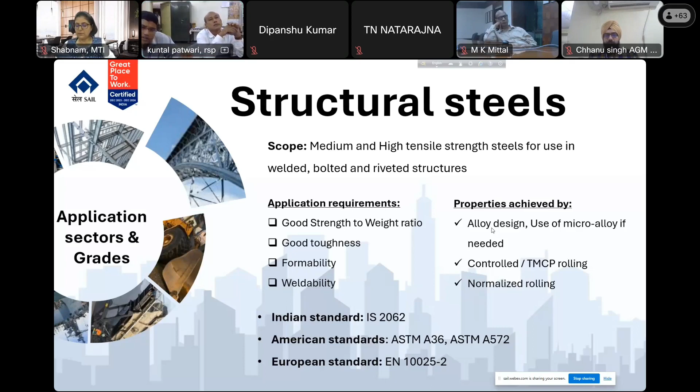Next, I'll talk about another sector of application, which is structural steels with atmospheric corrosion resistance. This type of steel is mostly used where we need a very good strength to weight ratio. We do not need to make the structures bulky or heavier, like using very thick plates. At the same time, we also need atmospheric corrosion resistance. This kind of steel may also be used in an unpainted condition - the specification allows us to use it unpainted, guaranteeing there won't be any corrosion.

So how do we achieve this corrosion resistance? We use some alloys like chromium, nickel, copper, the ranges of which are already given in the standard. Then again we customize it as per our need. Now, how do these elements protect my steel from getting rusted? They form an autoprotective layer - they themselves get oxidized and form a protective film over the base layer, preventing further corrosion.

This kind of steel is very much in demand in areas prone to corrosion, for example areas near the shores, near the sea beaches, where there is a lot of moisture around, a lot of salt around. So we need this kind of steel. For that, we also need to ensure high weldability, because when we add alloying elements, the carbon equivalent will automatically rise.

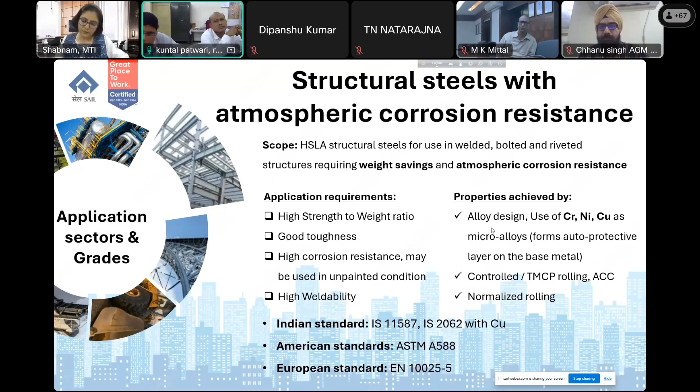Next, we move on to the next application sector, which is boiler and pressure vessel applications. Here, the steel has been categorized into three parts: steel for moderate and low temperature applications, and steel for intermediate and high temperature applications. This depends on the temperature, like if used in boilers working at high temperature, such as steam boilers, they will go for high temperature applications.

And there is another class, which is a heat treated, quenched and tempered condition steel. So these are the three categories of boiler and pressure vessels. Now, the application requirements: YS to UTS ratio should be high, there will be high toughness, high weldability, and we achieve this by designing the chemistry accordingly, going for TMCP rolling and normalized rolling as well.

In Indian standards, we have two specific boiler and pressure vessel codes, 2002 and 2041. 2002 is for high temperature application, and 2041 is for lower and moderate temperature application grade. Similarly, in ASTM, we have 515, 516, 517, and 537. 515 is high temperature, 516 is lower temperature, 517 is quenched and tempered, and 537 is also heat treated. For European norms, we have 10028.

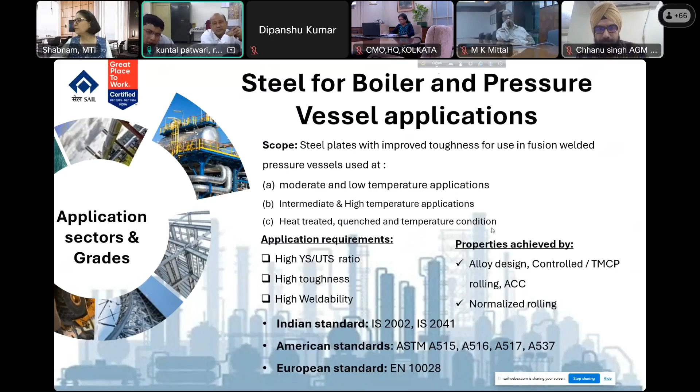Right, sir? So we'll be dealing with the technical specifications in the coming slides. I've just pointed out the brief over here, we'll go in depth in the later slides.

Next is another sector which we cater to, a very niche segment, and there is a lot of market I feel in Western India and in the Middle East as well - oil and gas pipelines. We had supplied material to Welspun and other customers, MAN also we tried, API grade plates and coils. There are some few orders as well.

So in this segment, we need very high specific strength, high toughness, high weldability, and the YS to UTS ratio has to be strictly adhered to, which is actually 0.90 in most cases - customers ask for a more stringent one. And there has to be a very high level of steel cleanliness, which we ensure by using inclusion modification control, by adding calcium silicide and other methods, by using compulsory RHOB which is vacuum degassing, etc., and a very low sulfur steel.

So earlier we had only American standards, which is API 5L, but BIS has developed another standard in line with the requirements of API and ISO, that is IS 18384. As of now, API is the leader in this segment - American Petroleum Institute certifies everything, but BIS has also moved in that path, and hopefully later we will be recognizing this and using steel for this standard as well.

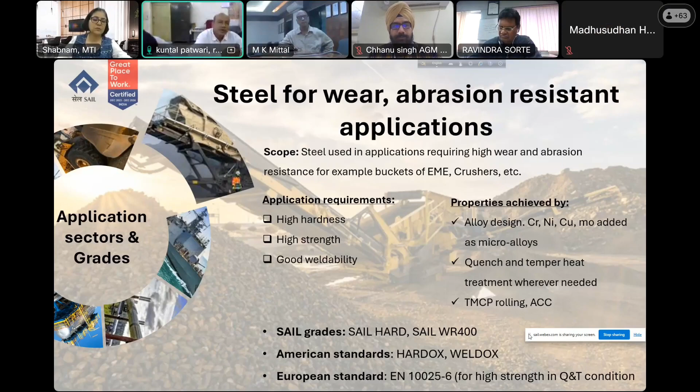Yes sir, actually as you know we are trying to get a normalizing furnace for our new plate mill, but we are still not able to finalize that. So what you are telling is another step beyond, we have to keep making effort.

That's all, yeah. So definitely, like there are plans which you pointed out correctly, there are plans which are having an inline quenching and tempering furnace and facility. So maybe in near future or sometime in the future we'll be able to do that as well. So sir, moving on to the next section, that is...

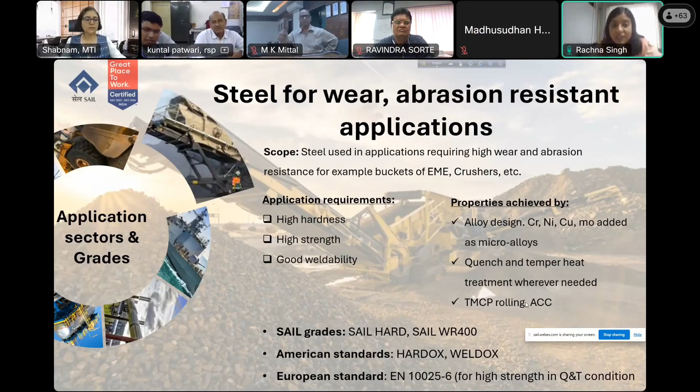One second sir, sorry to interrupt, I have one question here. This is Rachna from BSO Chennai. Yes ma'am, yes Rachna, go ahead.

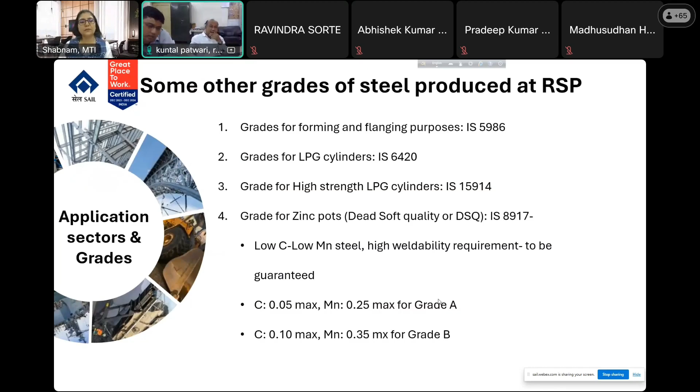Moving on, we'll talk about technical specifications. There are a lot of standards and specifications, and it's not possible to discuss all of them. So I've tabulated the applicable specifications side by side with the product specification - what are the testing standards, product standards, and inspection standards. Accordingly, orders can be booked and customers can be sensitized to these requirements. You have to stick to this, or if you need a different specification, you need to go for a different product. This is a very brief overview, so I'll skim through fast.

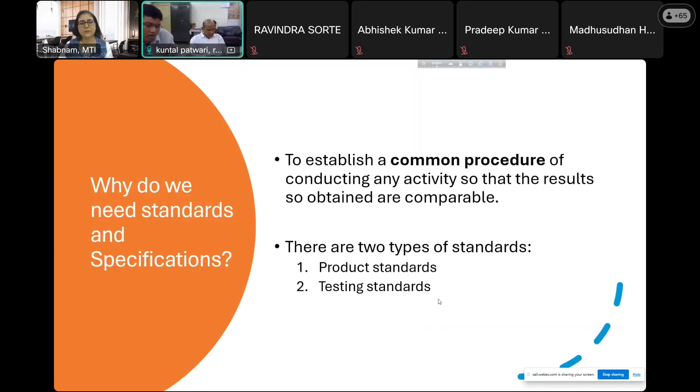We have two types of standards - product standards and testing standards. Whenever there is an order or we talk of a grade, every grade has a meaning - the name itself speaks about the grade. For example, take IS 2062 grades. The first two letters tell you it's an Indian standard. Then 350 tells you the minimum YS at the lower thickness - the least thickness - what minimum YS is to be achieved. And BR stands for room temperature charpy.

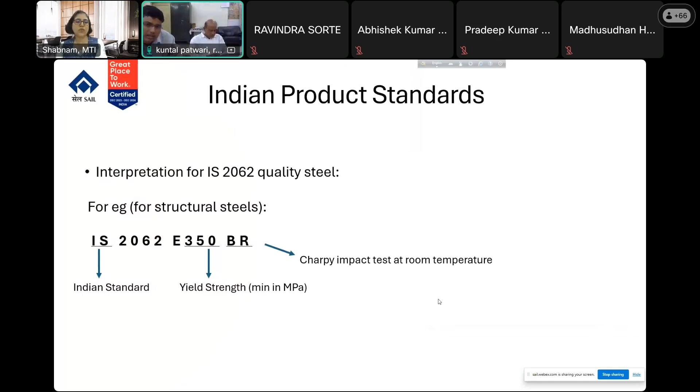So this is how we can at least understand what grade it is. We can make the customer understand what kind of material he is expecting and what are the requirements of that material without directly going to the standards - we can see the name and talk about it.

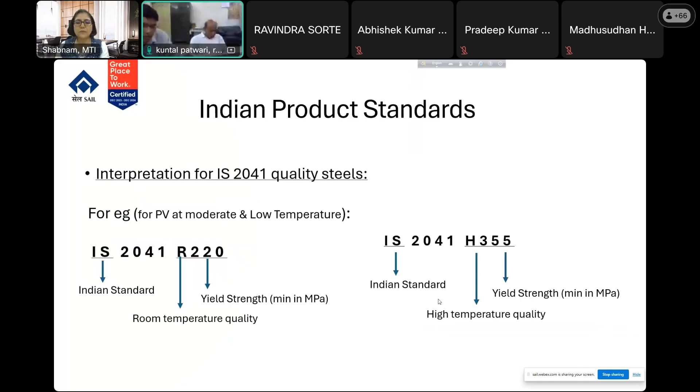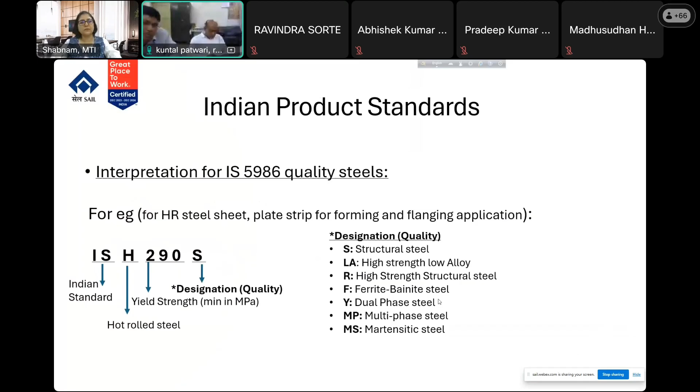There's another grade for flanging operations, forming and flanging operations - we make HR sheets and strip, where H stands for hot rolled steel, the number gives the yield strength, and S gives the designation. This designation depends on the application. We have structural steel, HSLA, high strength structural steel, ferrite-bainite steel, dual phase steel, multi-phase, martensitic - there are a lot of grades in this particular standard, depending on the type of application the customer has.

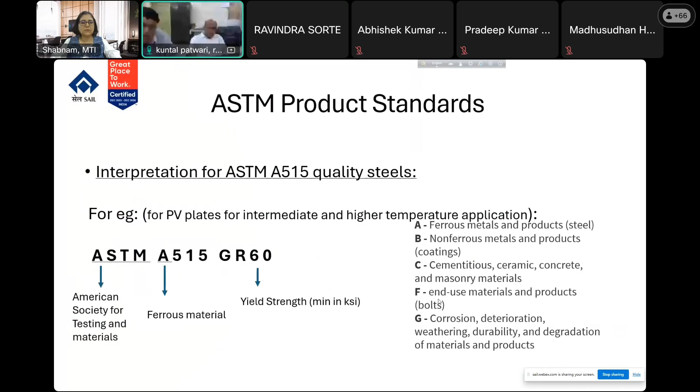There might sometimes be confusion among customers or even between us. Sometimes they ask for A516, sometimes SA516. What's the difference? They're one and the same - just used by two different societies. One is the American Society of Mechanical Engineers, ASME. When using ASME it's called ASME SA516, and when using ASTM it's called ASTM A516. So it shouldn't be confused that they are two different grades - they're the same grade, but the nomenclature is different.

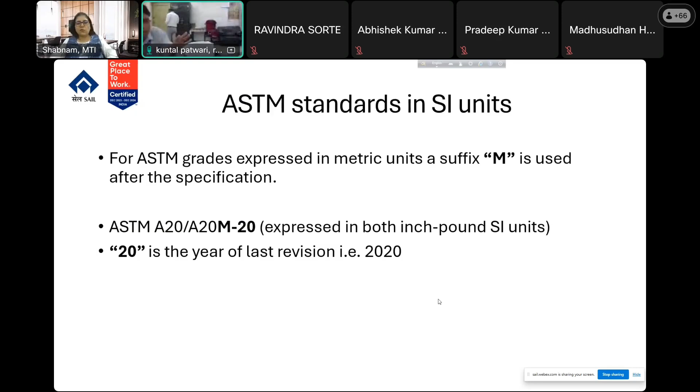Then in some cases, there will be a requirement when the party will ask for A20M, or the year of revision will be given. M stands for metric units. When you are using metric units, it is just A20M. It is nothing different, it is the same standard, so it should not be a confusion.

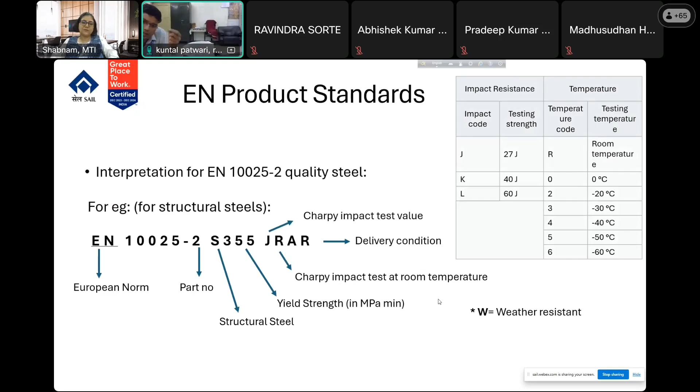Whenever we are doing any testing, whenever we are doing any quality assurance, we follow a particular standard testing method for a given product. I cannot do testing of IS 2062 by using ASTM A370. I cannot do testing for ASTM A572 by using IS 1608. It cannot be done because the testing methodology in both the standards is different.

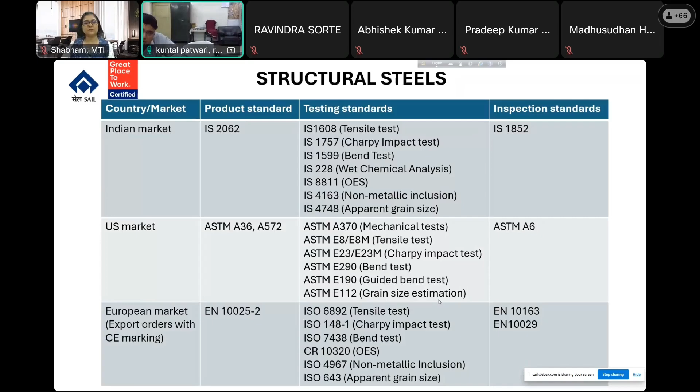So if a party is taking material from us and asking for this kind of combination, that has to be mutually agreed. And if a party is taking material to be tested in some different external lab, this also has to be seen - whether the right material is tested along the right testing standards or not, because the results will differ depending on the loading rate, the straining rate, the cooling methodology, which is mentioned in these standards.

So this is structural steels. I have not jotted down the entire standard here, it's not possible. I've just given some important points which I felt like there can be others we can talk on. But these are few points which I found interesting.

Like in IS 2062, if you see in all our 350, 450 grade materials or 410 grade materials, we are using microalloy addition. But addition of microalloy is not specified in the chemical composition of the standard - only carbon, manganese, phosphorus, sulfur, silicon, and aluminum is given. Niobium, vanadium addition is optional, it is on the discretion of the manufacturer. But we add niobium and vanadium for higher grades like 450, 410 to achieve a particular set of properties.

If we are able to achieve those properties without adding any microalloys, it's a win-win case for us. We'll be saving a lot of production costs on account of microalloy addition, and it will be easier for us to produce. There will be lesser soaking time, there will be easier rolling.

But again, from our experience, there are some limitations in our mill, there is some limitation in our process. That is why we are trying to add microalloys.

Another point I would like to say at this point is, earlier we were using a dual combination of alloys, niobium plus vanadium. But after some time we did some research at our end, we did some trials, we did some experiments. We talked with the process owners from SMS and NPM, and we have now come down to one single element, one single microalloy. We are only giving vanadium in most cases to achieve the sub-zero impact temperatures. Earlier, niobium was also given, vanadium was also given.

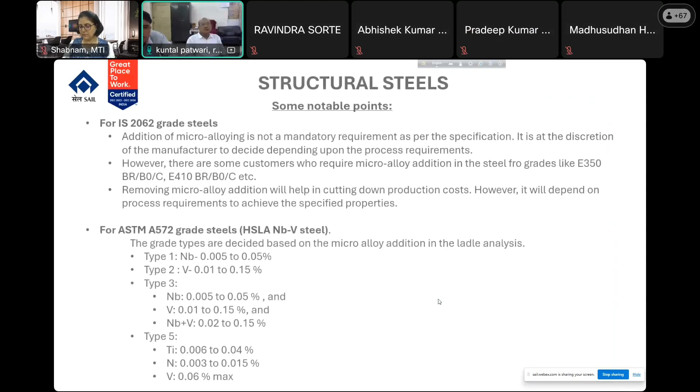Sir, I have a query on this testing method. I am Rakesh Das from Hyderabad. Sir, if we enter any order in IS grade, IS 2062, 250 BR or 350 BR, and nothing specific has been mentioned regarding the shape of the plate or shape of the coil—in case of HSM plate or PM plate—what standard do we follow for flatness or shape or rectangularity if it is not mentioned in the IS?

Nice question, sir. There is a possibility because the customer might not know what the testing standards are. He might not be a very technical person, he might just be a commercial person. So he will tell you he needs IS 2062 E350BR. In that case, in the IS 2062 standard itself, it is mentioned which standard you have to use for testing. They have already written that you have to go for IS 1608 for the tensile test, and IS 1757 for the Charpy test—it is already mentioned in the standard. So if the customer does not mention anything about testing standards, we will follow the testing standard given in the product standard. Am I clear, sir?

But my query is different, sir. If that is not mentioned in the IS, specifically regarding the shape. Okay, so you are talking about if it is not mentioned in the IS, from which standard do we derive it? Okay, I got the question now, sir—you are asking me about flatness and surface properties, right, sir?

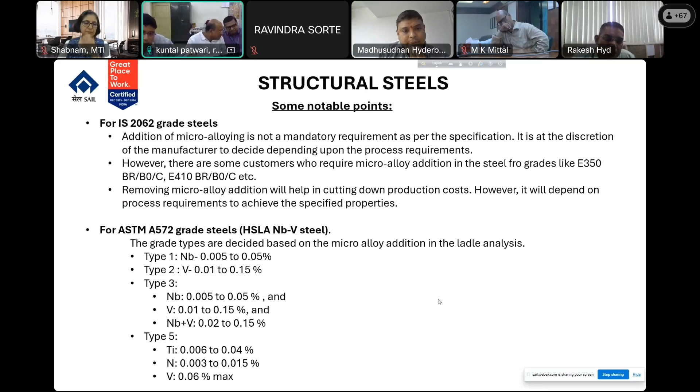Sometimes it happens in some orders where there is no mention in the TDC, nothing is mentioned, but the party again asks us that these plates have to be normalized. In such a situation, it is not possible for us to certify. So beforehand, it has to be communicated what kind of condition you require. Accordingly, we'll accept the order and we'll process it. This is a point.

And sir, in this 2002, it has to be a coarse grain austenitic structure. They cannot ask me for a fine grain austenitic structure - not possible, sir. Because if I go for a fine grain austenitic structure in 2002, it is a high temperature application steel. At higher temperature, there will be grain boundary sliding, because finer the grains, more number of grain boundaries. So at high temperature, these grain boundaries will soften, and after softening, there will be grain boundary sliding and the material will fail. That is the reason there is a maximum limit of aluminium, that is 0.02% in this kind of steel. If I go to the next kind of steel, that is 2041...

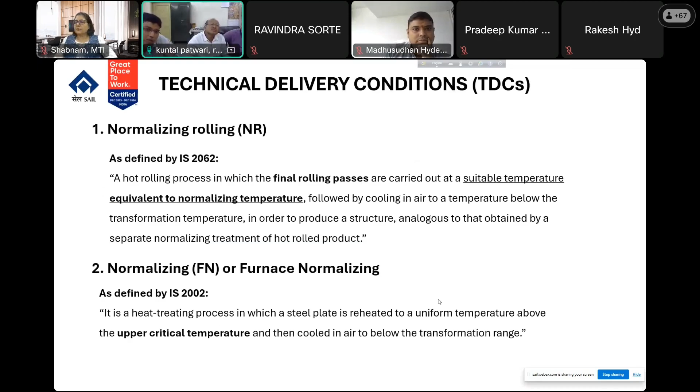There is a point about cooling in air - yes, it will be cooling in air below the transformation temperature, that has to be done. Your furnace normalization has to be heated to upper critical temperature, AC3 temperature, and then it has to be cooled in air. For higher thickness plates that come to us for boilers, we go for furnace normalization, and on the thinner side we go for NR. This same thing is mentioned in your TC, sir.

In many cases there is a doubt with the customers, or maybe some clarity is missing in the TC. They ask for degassing. In our TCs, we mention the process route as BF, BOF, RHOB, CC, then NPM. RHOB, which we mentioned, that is essentially the vacuum degassing technology which we use at RSP. It is a vacuum degassing technology which is used to remove dissolved gases from the molten steel. Other plants might be certifying it as vacuum degassing, but we certify it as RHOB, which is understood. This is a technical and accepted term, RHOB.

So customers who take this from us, for example, if I remember correctly, there was a query from BHEL also one time that vacuum degassing is missing in the TCs, but RHOB was mentioned. So in that case, the customer needs to be told that this is RH technology which is used for degassing. So this should be clarified, should not be a problem.

Then sir, regarding steel killing mode - sometimes there's confusion here too. OB stands for oxygen blowing in RHOB. This portion of OB is not done in RSP. We are using it only for degassing. Fully degassing mode, sir.

Sir, then we are going for killing. In killing, there are some observations by some customers on the TCs - we have not mentioned that it is fully killed. The steel has to be fully killed. Any steel which is produced at RSP is fully killed. There are three types of steels: one is rimming steel, one is semi-killed steel, one is fully killed steel. We only produce fully killed steel, either by aluminum silicon killing or pure aluminum killing, and that is mentioned in the TC itself. The notation I have given is ALSIK, which means fully killed.

So communicating this a bit more clearly would make things clear for the customer, and if needed we can also give a mail that this corresponds to fully killing. So it should be communicated. This should happen, there isn't much of a problem with this. Sir, is it not feasible to put this on the TC that it is fully killed?

Yes, yes, we are mentioning AlSiK. So can it be written like in Bhilai, that it is fully killed? Yes, sir, exactly, I am also saying the same thing Abhishek is saying. In Bhilai plant TCs, on the topmost corner, it will be mentioned killing - fully killed steel. And they will mention below whether it is aluminum killed or silicon aluminum killed or only silicon killed. They will specify separately. Can we not have the same thing in RSP TCs also?

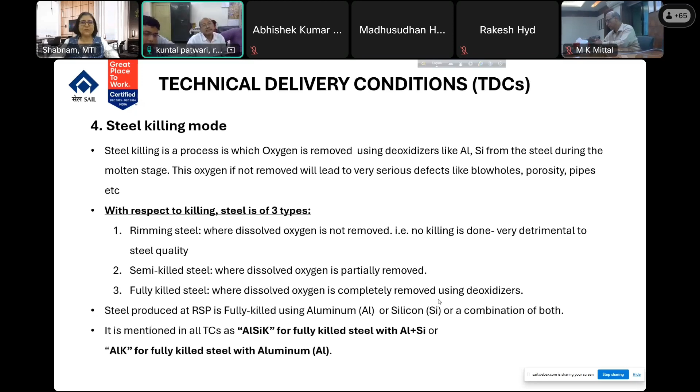Okay, we'll check it out. Point taken, sir. There are so many abbreviations, so many things they have to incorporate in that TC. That is why sometimes it becomes difficult because there's a character limitation. We'll look into that. If it's possible, we'll definitely do it. We'll take it up with our C&IT team and try to modify the TCs, the structure of the TCs. Point taken, sir.

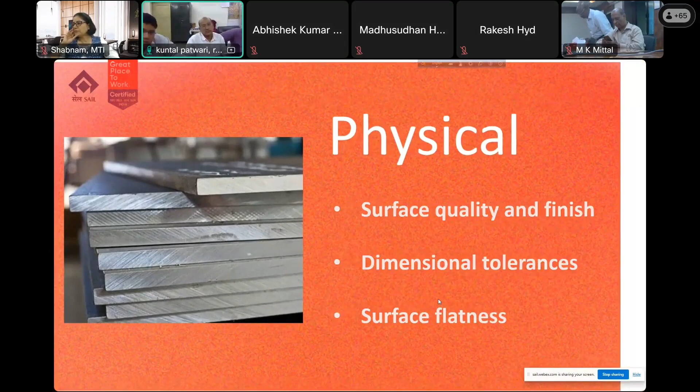Now we'll quickly move on to the mechanical part. In mechanical properties, there are basically 6 properties which we try to assess: strength, toughness, ductility and formability; DBTT, ductile to brittle transition temperature, in case of API grade steels and other specialty steels; resistance to lamellar tearing; and the last is hardness.

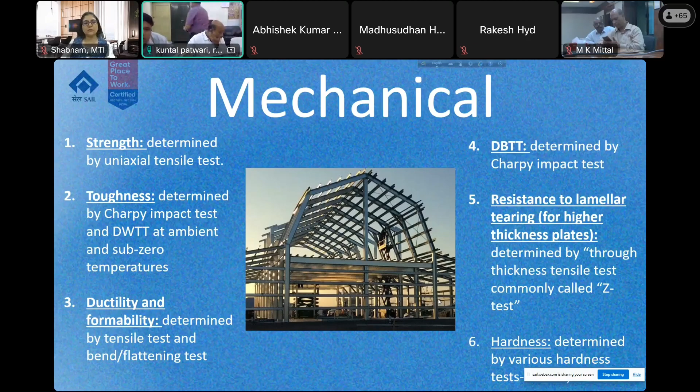These are some of the tests which we perform to get this kind of assessment. This Z test requirement is mostly for thicker plates, because there's an issue when they're used in welded joints. If there are laminations in between, then in due course of wear and tear or load bearing, it might laminate and fail. So we do tensile testing in the thickness direction to see whether there is appropriate reduction in area or not. I've given a few slides on the testing just for observation.

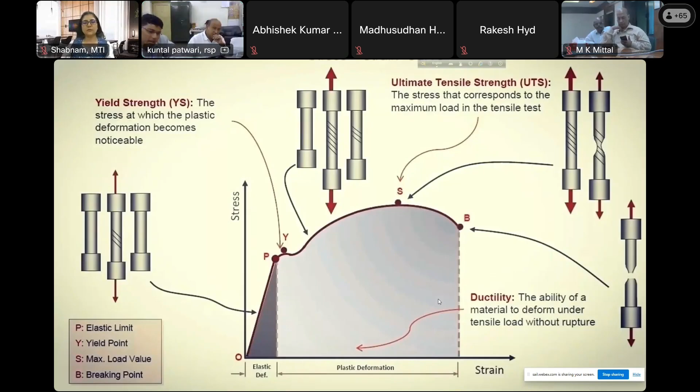This is a typical tensile graph, stress strain graph. We have YS, UTS and the fracture. When we see the surface, these are actual tested samples at the test house. We have a cup and cone structure for ductile fracture, and we have instantaneous fracture for brittleness.

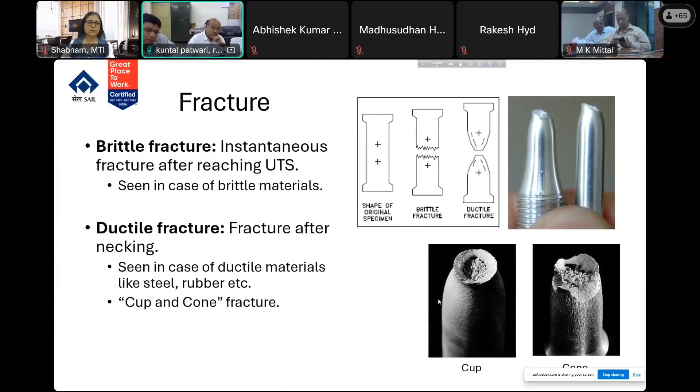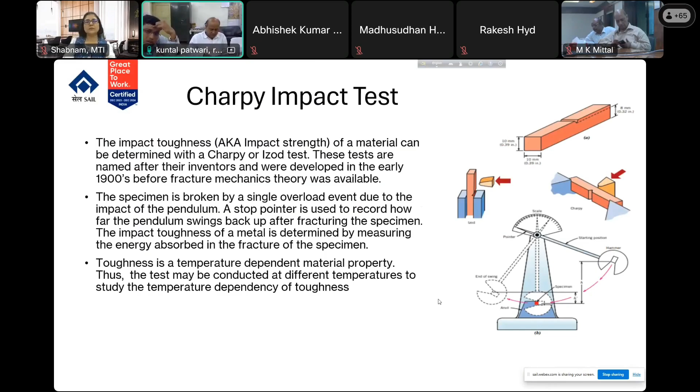Then we have a Charpy impact test. The Charpy impact test is done to assess the toughness of the material. It's a very scattered test, which is why the standard mandates us to do 3 tests and take an average, because we're testing a very small piece of a very huge plate. The sample is just 10 by 10 by 55 mm, a very small piece, so we take an average of 3.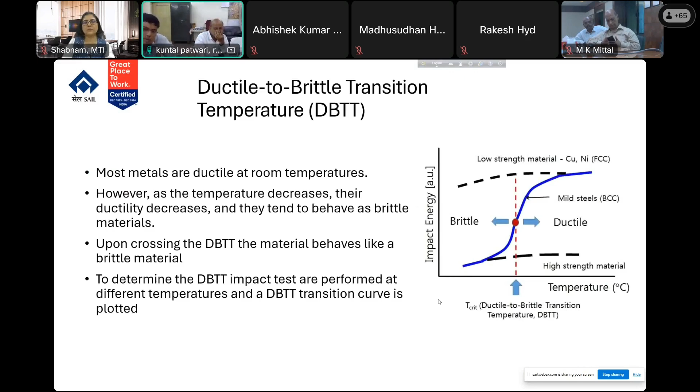So in API specifically, we have the ITP and MPS. We are going to make the DBTT curve, testing the sample at -80, -60, -40, and this curve will be plotted.

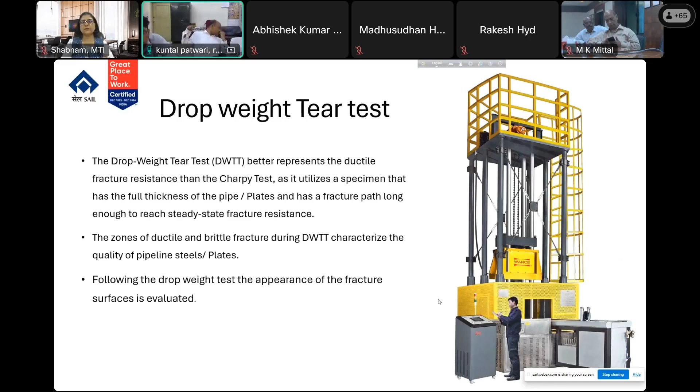This is a drop weight tear test. It's specifically used for API 5L PSL2 grade material, plates and coils. In Charpy testing, we take a sub-size specimen, a 10 by 55 mm sample maybe from a 50 mm plate, so it's not representative of the entire thickness. But in a drop weight tear test, we take the entire thickness of the plate as it is.

This is a sample dimension on the screen. On the right hand side you can see the sample which has been fractured. It's mostly a qualitative test - we try to assess the surface of the crack, how it looks, how much brittleness is there, how much ductile area is there, whether the material failed in a shear, ductile way or broke in a brittle way, at different temperatures starting from room temperature, 0, -20, -40, and so on. This is a requirement specifically of API 5L PSL2, not PSL1. The drop weight tear test is a type of impact test.

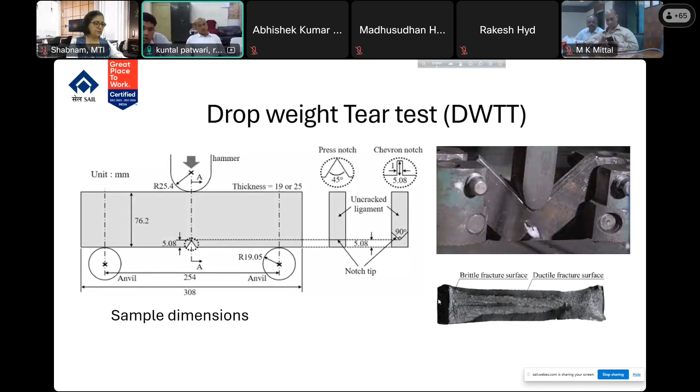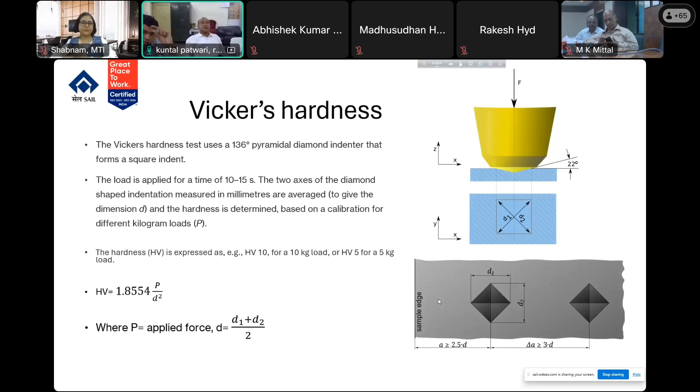We also do Vickers hardness, where the indenter changes. The three types of hardness - Vickers, Brinell, and Rockwell - are interchangeable. The values can be changed from one to another by looking at some charts. The indenter is different in all three. There is Rockwell hardness as well, but we do Brinell and Vickers here.

So lastly, we come to the chemical analysis part. In chemical analysis, we assess three areas: the chemistry, the segregation in slabs, and the inclusion in the product. The chemistry we assess through optical emission spectrometer by giving a spark emission spectroscopy.

In slabs, just after casting, the centerline segregation is estimated by doing macro etching. Earlier, sulfur print was being done, but that practice has been stopped. It's not allowed, no one does it anymore - it's very dangerous and hazardous. So we have moved on to macro etching.

Finally, when the plate is rolled, this segregation line will try to change its position, and it might even collapse or scatter. So in the product stage also, we do an inclusion rating - thick and thin series of oxide, sulfide, alumina, silicates - and we try to assess how much inclusion content is present in the steel.

The cleaner the steel, the better are the properties. We always aim for a clean steel. In that direction, we have implemented a couple of stages - CASI injection, calcium silicide wire injection, has been done to modify the inclusion shape.

Usually, what are the inclusions to be talked about? Inclusions are any foreign material, non-metallic material - slag, or anything, let's say sand for that reason. It is an inclusion present in the melt. Now, when solidification happens, this inclusion will just be like a foreign material inside the entire block. There will be no proper fusion, and when load is applied, there's every possibility of a crack in that inclusion region.

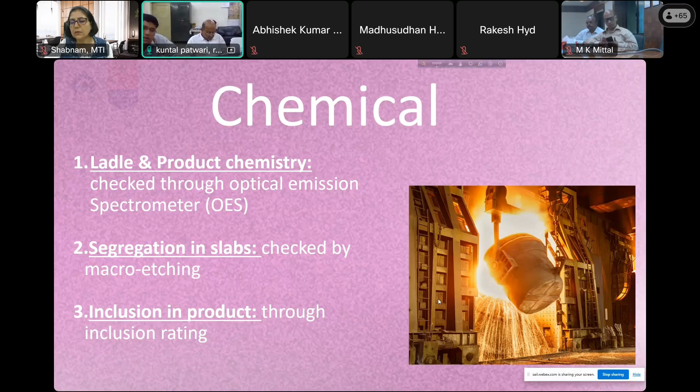Because in HSM2, we go for very narrow gauge, very thin gauges, and when we go for thin gauges, there are laminations. If there are any laminations during the course of bending or during use, there is a chance it will crack or break. That possibility is there. So these were the product features, the product attributes we look for in a steel product - physical, mechanical, and chemical - and try to ensure these conform to the relevant standards.

After this, we'll talk about the unique selling points of RSP products. I have tried to put down some of the points - we can have a discussion. If you have more points, sir, you can apprise me, I'll also learn in this process.

For example, the first point I'm trying to point out is, Giri, we're having an in-house... excuse me, Giri, there is one question from Rohit Hooda from BSO Hyderabad.

Yes, please, ma'am. He asks why aluminium killing process is costlier than silicon killed, and the benefits of both types of killing methods. So if you could just throw some light on this.

Why is aluminium killing costlier than silicon killing? Because of the deoxidation practice. Basically, we are using silico-manganese for deoxidation here, and for aluminium killing, we are using aluminium as such. So the price of silicon and aluminium is different, and because of that difference, the cost is different. So aluminium killing is costlier than silicon killing - aluminium is a very costly material.

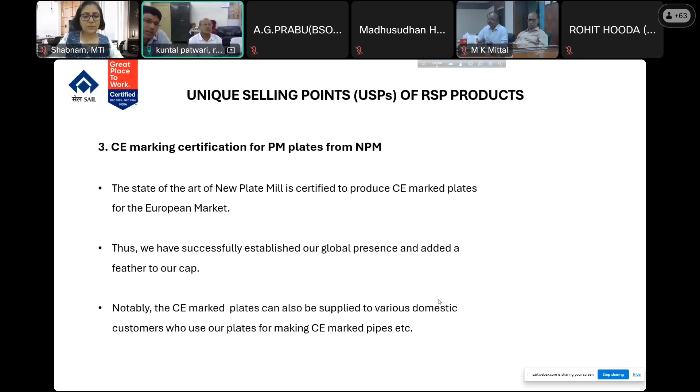Then there is this CE marking for HR coils. We did it last year. We are having an audit on the 25th of this month. So we have got an order, it is in the finalization stage as well. We'll be producing HR coils and plate from HSM2. There's a huge market, we'll try to tap into that and create a niche for us.

Then there is API certification for HR coils for HSM2 and PM plates. We are having X70 PSL2 grades, so we can manufacture anything below that. Right now, as Mukesh sir is also aware, we are processing few orders of API X52, X46 and X70 from both plate mill as well as HSM2, and we expect that in days to come we'll be able to supply more.

We have already supplied a 6,000 ton order for Messrs Welspun in 2019-21, successfully done with a very lean chemistry, which is actually an achievement for us. We faced a lot of trouble, a lot of issues, but ultimately with our team's effort and with help and support from various departments, we were able to optimize the chemistry in such a way that we could achieve the properties with a very lean chemistry. That was an achievement for us, sir.

Now I'll speak on some of our recent supplies and success stories and cases which we have accomplished recently, so that we can look into them and discuss if needed.

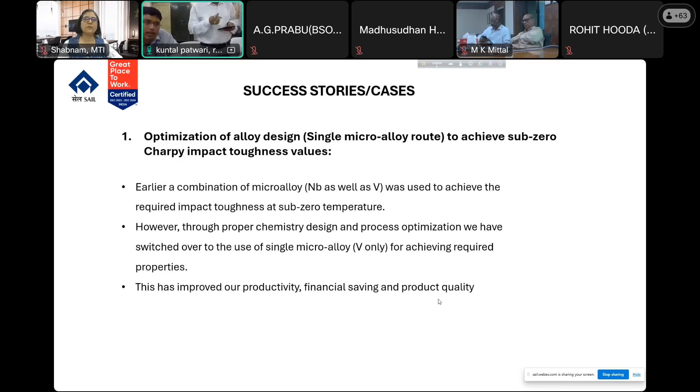So overall it's a win-win case for us, for the customer, for the company. As a quality in-charge or production in-charge, it is good for the mills because they have increased their productivity. As a plant, it is good for us that we have financial savings. For the customer also, we have product quality improvement, the Charpy value improvement. So this is one of our success stories.

Now we are successfully supplying specialty steel for critical defense projects. This is something we are doing on a regular basis, and we expect more orders to come since the Ministry of Defense has given a lot of clearance for new projects of shipbuilding and marine vessels. So we are hoping more orders will come. It's a very specialty grade steel, good NSR, but a lot of effort is given, and we have stabilized to some extent. There are very few failures these days, and we are in a tune to supply these orders.

I must point out here that the topmost defense person associated with this project has acknowledged SAIL RSP's role in the continuation of all the Indian Navy projects during the Russia-Ukraine geopolitical crisis. Earlier, a lot of steel was imported from Russia and foreign parties for manufacture of all these vessels. But since RSP and our sister plant are producing DMR grade steel in-house in India...

These projects were going smoothly without any disruption, without any problems, no dependency on outside parties. It was a totally Atmanirbhar Bharat Abhiyan. We supported it wholeheartedly. The appreciation has come from the highest levels. So this is one of our major achievements which we take pride in as a company, as a team. So we have done this.

So my presentation roadmap is: I will be discussing features of the new plate mill at RSP, then what are the rolling challenges, what quality issues we are facing, how we are addressing them, and how we are planning to address them.

This is so that all the scales generated in the slab during residence in the reheating furnace for almost 3 hours, more than 3 hours, are removed. Because if they are left as such and rolling is continued, these scales will be rolled into the parent body, resulting in rolled-in scale.

So primary descaler is a very critical function that must be carried out before rolling starts, and in the finishing mill the actual rolling takes place. Based on plate thickness, grade, temperature, size, and TDC requirement, number of passes are calculated as per the setup and mathematical modeling.

Then as per setup, rolling is carried out. During rolling also, a number of descaling operations - secondary descaling - is done, so that whatever scales are generated during rolling are also removed and not rolled in. Secondary and tertiary scales are also generated during rolling.

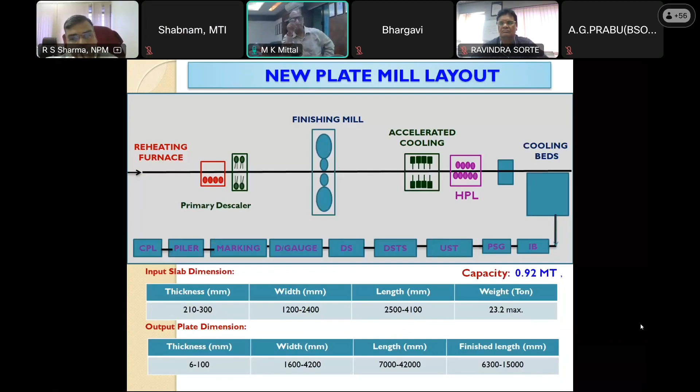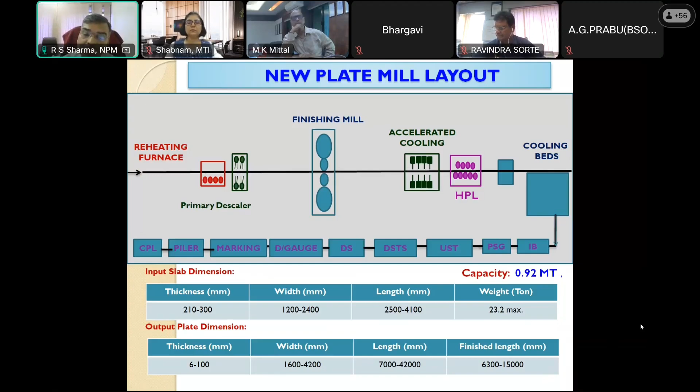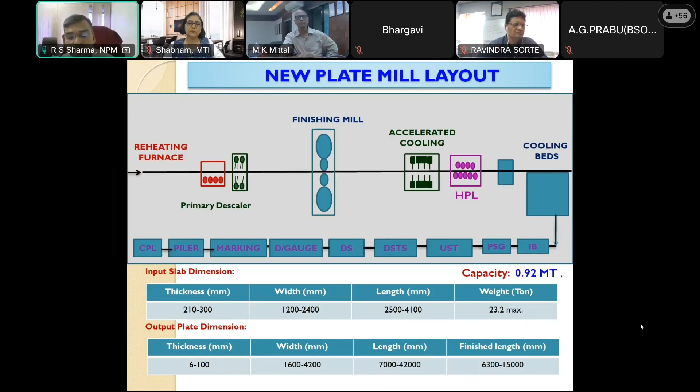Is it possible to stretch it to 17, 18 meters by some small modification? Not at present, because our finished length is maximum 15 meters. Accordingly, cranes, crane girders, and columns have been designed for that. So for achieving 17 meters, many more changes are required in the finishing line to incorporate 17 meter long finished plates. Even the software logics are mapped according to 15 meters, because tracking has been created based on 15 meters. So to handle 17 meters, many things have to be done to process that plate. So presently, no. Thank you, Shahzad.

Next is our first unit, as I told, the reheating furnace.

This mill is our 4.3 meter wide single stand mill with rated capacity of 1 million ton slab, that means 0.92 million ton plate with 92% yield. The mill was commissioned in October 2016. Though operations started in June 2014 with limited facility, we could only commission in October 2016. Since then, continuous ramping up of production has taken place, and in the last 2 financial years we have crossed our capacity also.

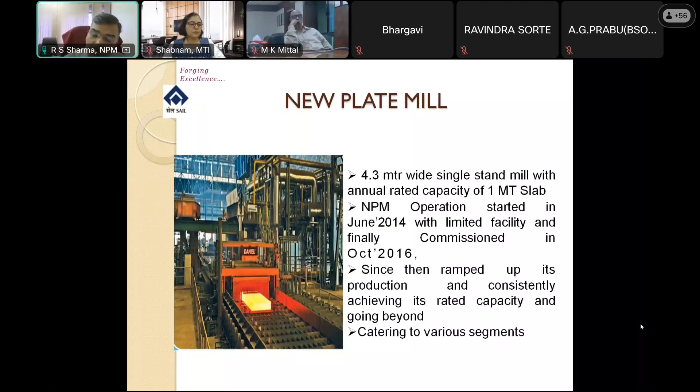This is our last 4 years' performance with respect to total production and percentage special steel. In 2020-21, we produced 8,02,641 tons. That was the era of COVID, so there was less production because of input raw material issues. At that time we achieved special steel of 55.68%.

In 2021-22, we crossed our APP and capacity utilization. Capacity utilization was 9,20,000, we achieved 9,30,000, with special steel at 76.8%, the highest till now. The major contributor to this was boiler quality grades, and most of them were taken by mega infrastructure projects. That was the major reason we achieved 76%.

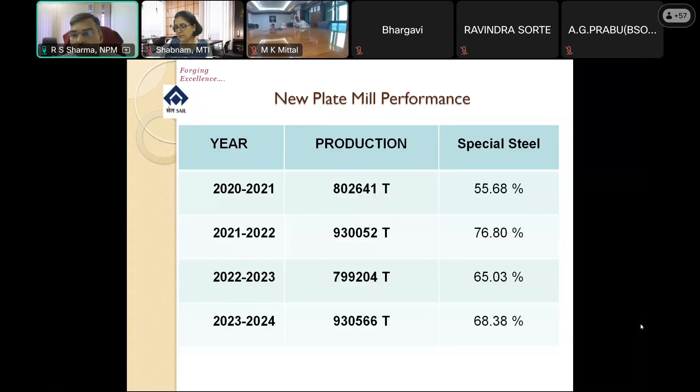After that, in the following 2 years we have not achieved that figure because orders are not there from mega projects to that extent in boiler grade. Then in 22-23, there was again a dip in production because of a series of major breakdowns, 2-3 breakdowns that limited our production. But immediately after that, in 23-24, we bounced back and again crossed our APP, reaching the best figure till now, 9,30,566, with special steel at 68%.

In 23-24, the major grades we supplied were grade 2, grade 3, that is boiler, at 45,000 tons. We can see boiler is only 45,000, earlier it used to cross more than 1 lakh in a year; in 21-22 we crossed that figure. DSQ 4,500, IS 2041 12,000, then 350 BR BO and C 2,67,000, 450 grade 17,000, and 450 BR copper 1,900. Then export 64,000.

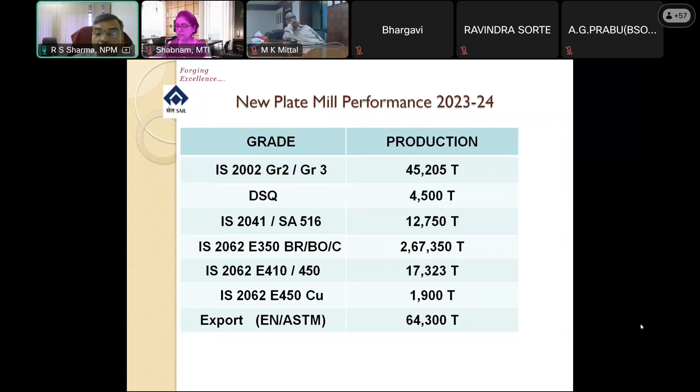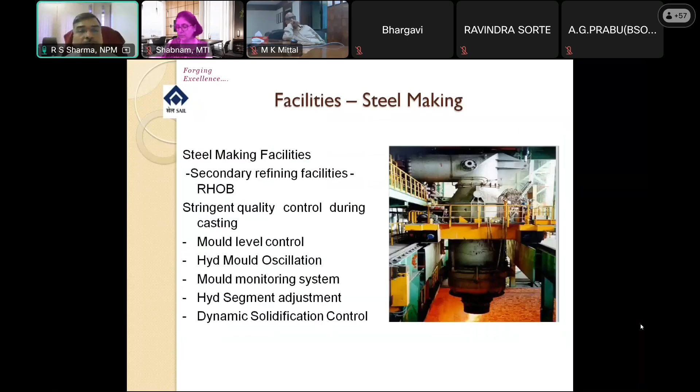And since these facilities, as I've seen, quality has already been elaborated, I'm skipping these facilities. RHOB they have discussed in detail, and the benefit of RHOB also. So I'm coming straight to our NPM facilities.

After the furnace, as I told you, there is a high pressure descaling pump having 220 bar for removing the thickest of scales. Then our mill has a roll force of 9,000 tons, equivalent to 90,000 kilonewton. This is the major USP of this mill. So whatever slabs we get, we roll with this force, and the reduction takes place right up to the center line. So there is complete reduction, and voids and porosity are removed by this, ensuring the internal soundness of the plates.

So earlier we used to give plates without UST, and those were passing in UST also. There was the contribution of the mill basically.

Then in the mill we also have HAGC, hydraulic automatic gauge control, for controlling the thickness. This is a vital function that ensures the thickness across the plate width and length.

In the next slides, I will talk about the thickness variations which the mill can provide. Then this mill has 3 technologies which control the plate shape: roll bending, roll shifting, and PVR. I will discuss this in detail.

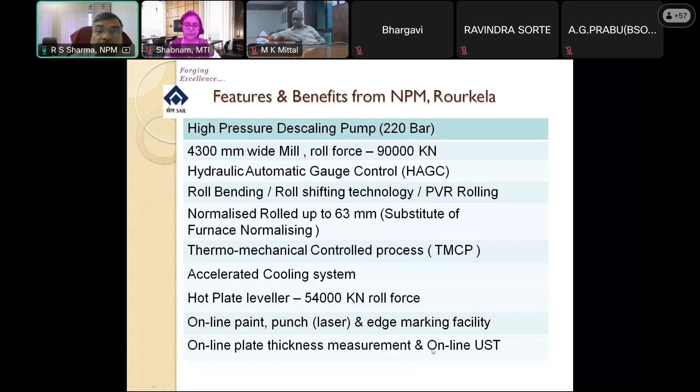Our furnaces are supplied by Tenova Italy with an hourly capacity of 225 tons per hour. There is a 2-row charging digital control walking beam furnace. Our length is 55 meters, width is 9 meters. The fuel used is mixed gas.

Minimum retention time is 3 hours, but basically average retention is 3.5 to 4 hours. Recently, with increase in production and productivity, the retention time has reduced to 3 to 3.5 hours. This has helped us in achieving the production productivity and reduction in scale.

We are also maintaining a very low discharge temperature at 1170 to 1220, which helps in achieving the mechanical property or material property of the plate by finishing the plates at a very low FRT, finish rolling temperature. So we keep the discharge temperature of the furnace by design at a low temperature around 1200 to 1220 degrees centigrade. Higher we keep it, the more difficult it will be to achieve the properties at the end of the rolling facilities.

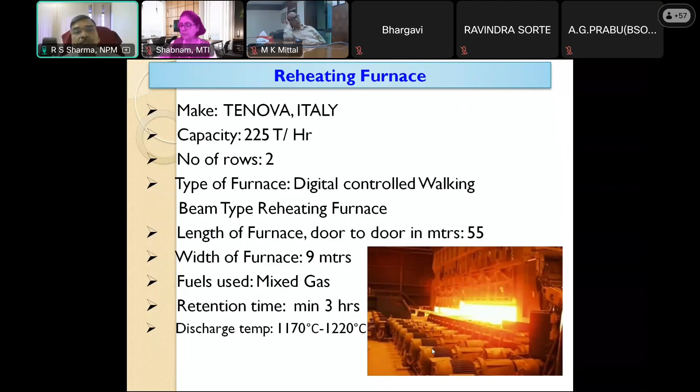These are basically mill stand details. I'll not discuss much details because I have already told roll force is 90 meganewton and mill stretch 2.67. But these are the roll dimensions, work roll and back roll, and the motor capacities are there.

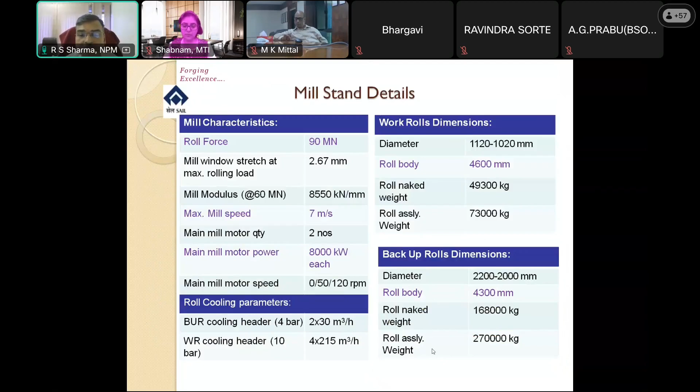And this is the tolerance, thickness tolerance, which you might be interested in knowing what our mill is capable of. So the mill is designed to achieve these thickness tolerances, graded thickness group wise, 6 to 8 mm is plus minus 0.22. So if we are rolling 8 mm say, our thickness variation will be 0.44 in a plate.

If 8 mm is given, then we will be achieving 7.78 to 8.22. That is the range it will operate in. So within that band, the mill will be able to supply plates. Accordingly for other thickness also, the higher the thickness, the range increases.

Somebody may ask, then what will be the maximum thickness difference that this mill can supply within a plate? Because the earlier table was for a thickness range, like 8 mm, what is the range? But for a plate, the maximum thickness range is again graded thickness group wise, and it is mentioned as 0.25 for 6 to 8 mm, 0.27 for 8 to 15, 0.30 for 15 to 25, 0.33 for 25 to 40, 0.37 for 40 to 80, and 0.40 for 80 to 100.

The mill capability over the period of 10 years - we are facing some difficulty in achieving this thickness tolerance. Still, we are achieving around 4.4 mm, plus minus 0.4 mm in thinner gauges. That we are able to achieve, and we are supplying the orders according to that.

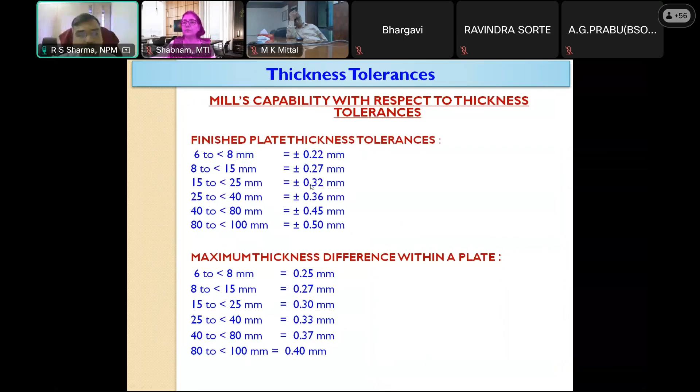This is the descaling process of the reheated slab. Nozzles are placed from top and bottom, and the slab is descaled at a particular angle, attack angle, and height with a pressure of 220 bar. And this removes the scales.

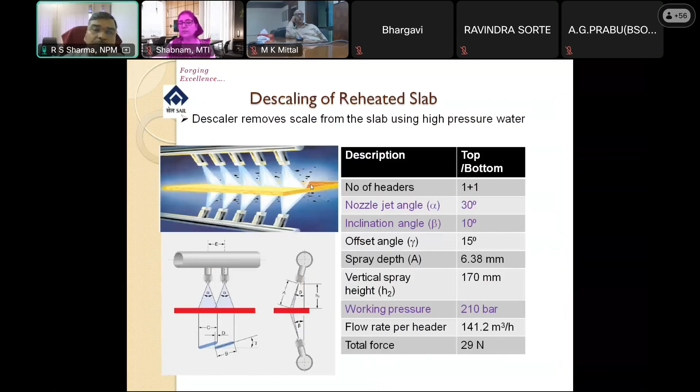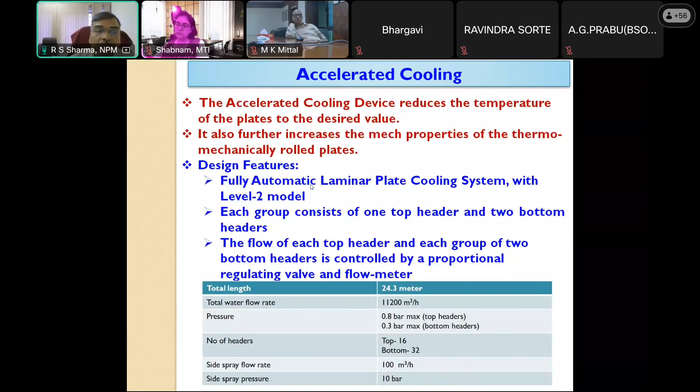Accelerated cooling has already been discussed. Again we have headers at the top and bottom to cool plates equally. The laminar plate cooling system is applied with a level 2 model. So what we feed is the plate input temperature, what our output temperature should be, and what the cooling rate is. Accordingly, the level 2 model defines the setup, the AC setup, and cooling is carried out.